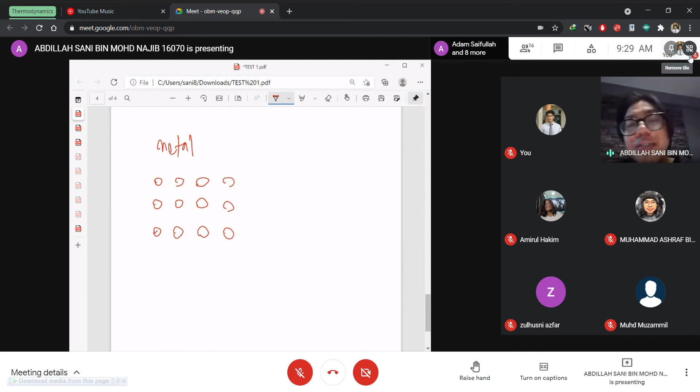Oh this is English right? Okay, sorry. I'll change back. Okay, so just take a quick look on our test 1.

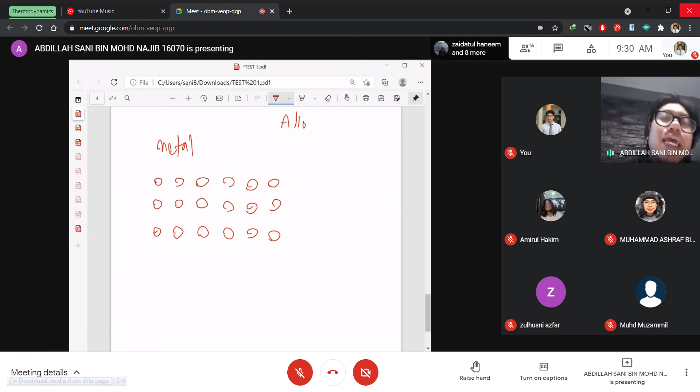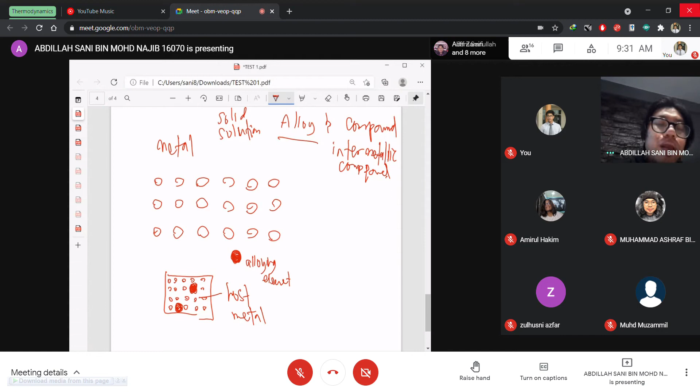We have some confusion to differentiate between alloy and compound. Okay, basically alloy, even though there are some compounds which we call intermetallic compound - okay, this is an exception lah. Intermetallic compound we can consider as alloy, that is an exception. But in general, when we talk about solid solution alloy, which is in the question lah, solid solution alloy. So what is meant by solid solution? We have a metal, okay, we have a metal, host metal. So metal has a uniform or repeated structure, repeated pattern. Okay, it's always repeating. So when we add something, some foreign material, or we call it an alloying element lah. Alloying element which is large enough, it will become substitutional. Okay, and this presence of alloying element in the matrix, okay, so it does not involve any chemical reaction.

It doesn't have any ionic bonding whatsoever. Okay, it's just physically there, and likewise, if you have a smaller atom alloying element, so it will get in between those structures, in between the structure, and it does not involve any chemical reaction, no chemical reaction, just physically there.

But if we talk about compound, this is alloy. If we talk about compound, okay, so they are like, for example, tungsten carbide. So they react, okay, they react. Carbide, oxide, nitride - all this is due to chemical reaction, and they interact with each other. They have this bonding, covalent bonding, ionic bonding, and this is strong between two atoms. Okay, but this one only small amount, and it does not have the bond between this particular pair of material.

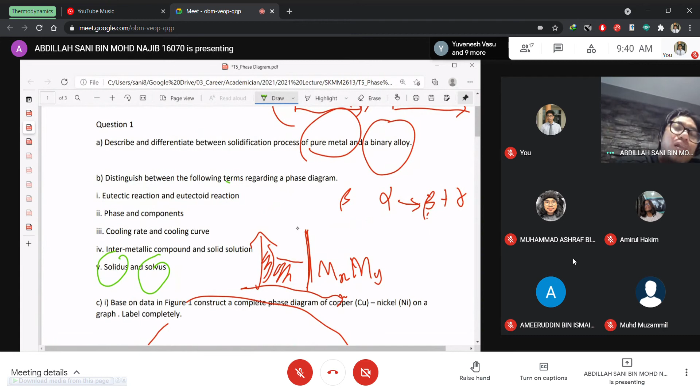Okay, tak apa. Saya akan look into it. Saya akan buat satu benda yang comprehensive notes yang boleh memahamkan.

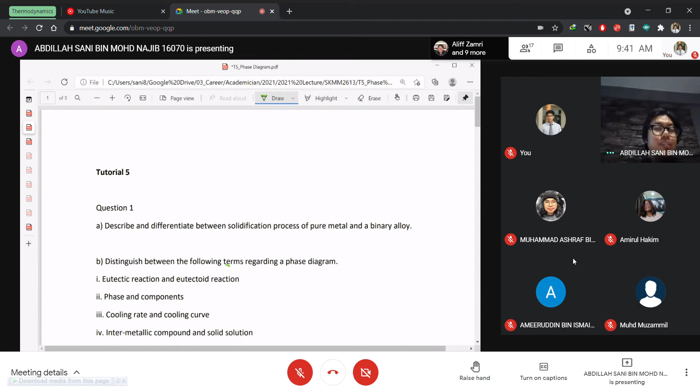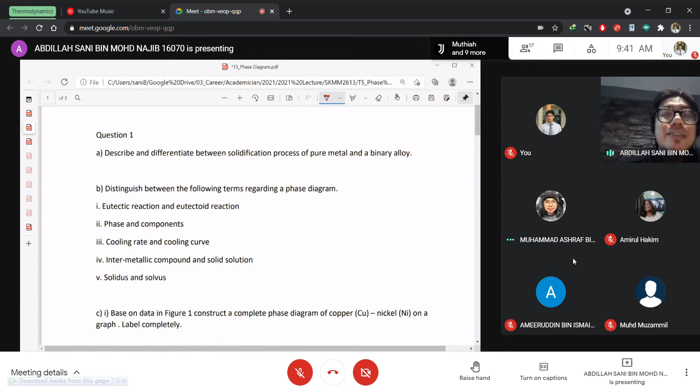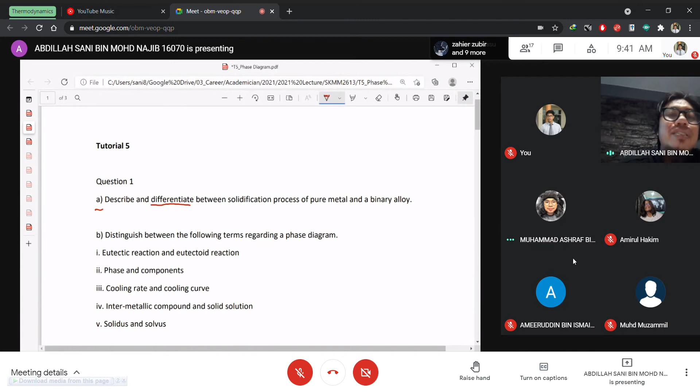Okay, so since we don't have that much time, around 9 minutes, I will just briefly explain this. So question number 1A tells us to describe and differentiate between pure metal and binary alloy.

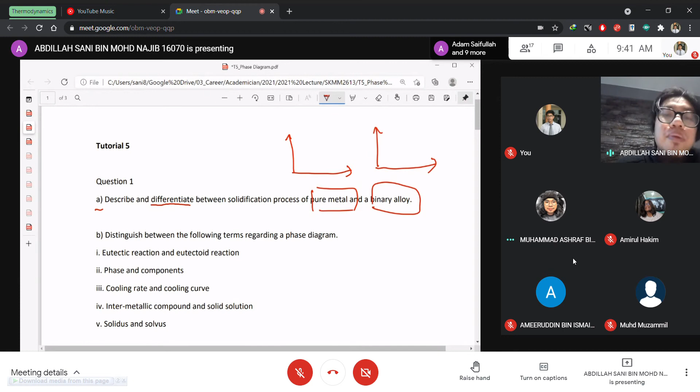So pure metal, I think this one also in the exam. The most important thing that you need to point out when we talk about solidification, you should mention the cooling curve. This is compulsory. If you don't put it, then it will be very difficult. And cooling curve number 1, you can also include microstructure, like the columnar structure and all these things. But the most important is cooling curve because we want to differentiate between pure and binary.

So we have like this for pure, like this for alloy.

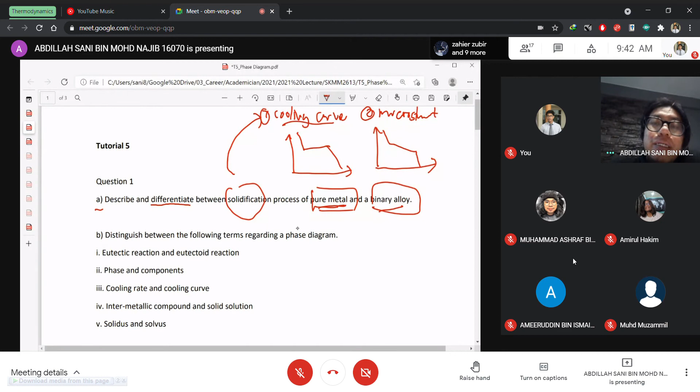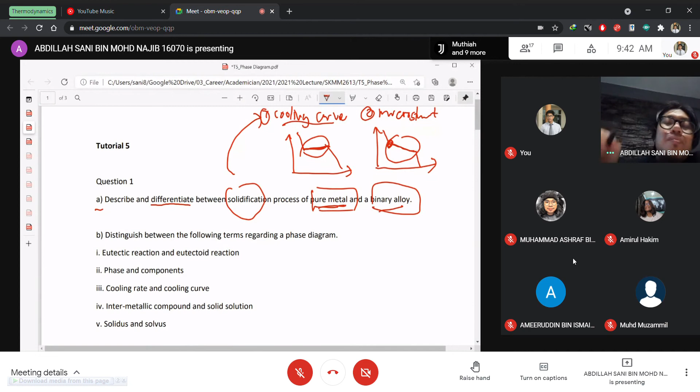During the solidification, the pure metal, it occurs at constant temperature, but for alloy, the temperature decreases during the solidification because we have two materials. So the solidification starts with one element first, one atom solidifies first. So that is why we have this kind of difference between these two. So this is the key point that you should mention.

And eutectoid. Okay, this one let one of you guys try. Okay. Cuba Alif Zamri. This is random. Eutectic and eutectoid. Do you remember anything about it?

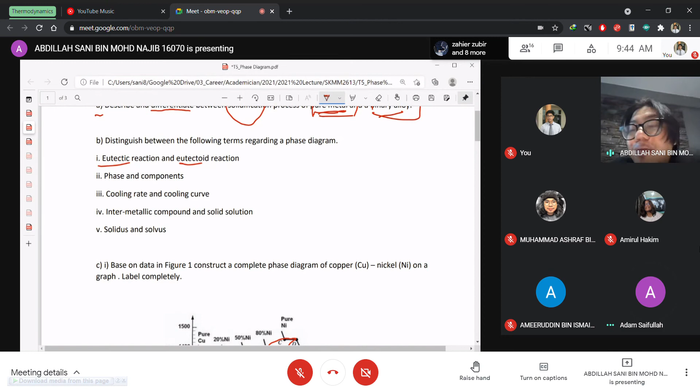So eutectic and eutectoid, what can you recall from this term? Eutectic liquid, when we eutectic reaction, liquid dia bertukar ke two solid phase. Okay. Kalau eutectoid, solid, dia transform kepada two solid phase. Okay, so that's how it is defined. So ada liquid, ada solid. Alright.

Phase and component. Phase and component. Afiq Rohaizam, anything you can share about phase and component? Apa beza dia? What's the difference?

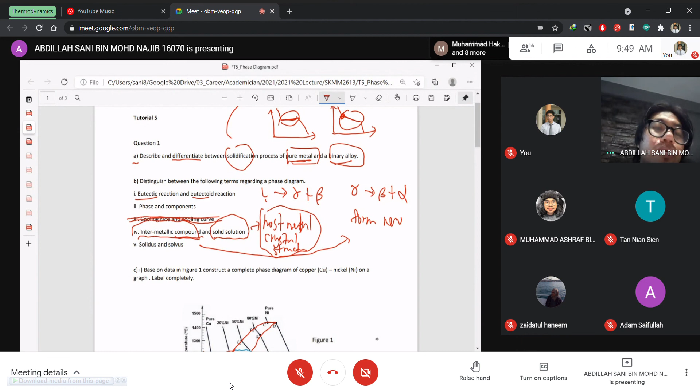And since we are relating this to phase diagram, for solid solution, we can mention that in phase diagram, it is represented by area. Okay. And intermetallic compound, if you remember, I have mentioned in the lecture that it is represented by line. And it has fixed or stoichiometric ratio between metal 1 and metal 2. It has integer ratio between them.

Whereas the solid solution alloy, it has a range. It can vary between these numbers and it still remains that alloy. So there are a few points. One is the crystal structure you can mention. Two, reflecting to the phase diagram, it is represented by line and area. And three, you can say that it has stoichiometric ratio for the intermetallic compound.